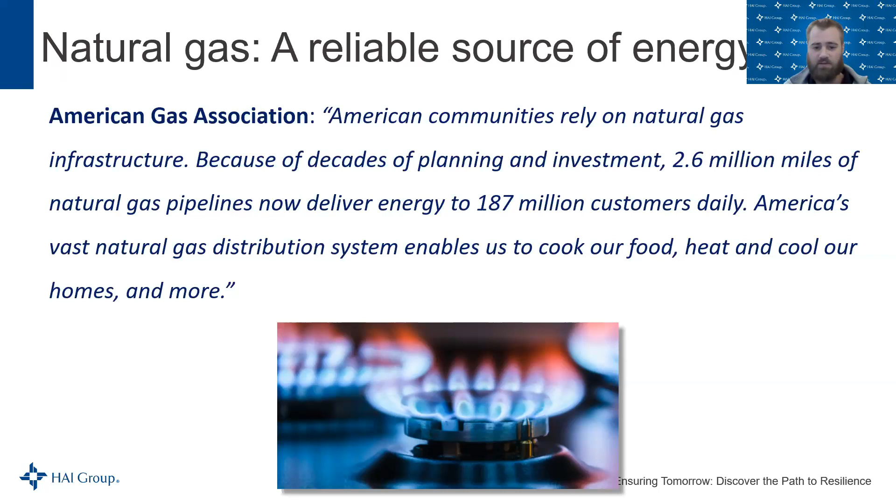For today's purposes, we're only going to be discussing natural gas. The only time that we really discuss something other than natural gas is during the properties and characteristics portion, where you'll see a video that a former coworker of mine who's since retired put together to go through the properties and characteristics and compare them to propane.

So why are we here? There are four main reasons. We're not necessarily going to go over the first one, but there was an explosion at an apartment complex in New Jersey in July 2023. That prompted the HAI group to reach out to Eversource to see if we could provide some insight on how we could avoid potential natural gas incidents. So that's really the framework or reason why we're here.

But we're also hoping to give everybody an understanding of the natural gas distribution system and how it relates to what you can do to keep your organization and the residents that live in the properties you insure safe. Hopefully we'll provide an understanding of the properties and characteristics of natural gas and how they can be dangerous in certain situations, and try to improve safety by understanding what property managers can do during an emergency and what residents can do if they're concerned about gas-related issues. For example, a gas leak, an odor of gas, or a carbon monoxide alarm going off, both inside and outside issues.

Just as a reminder before we go through it, gas is used safely on a daily basis across this country. We have 187 million customers. When it's used correctly and everything is being done to regulations, it's a very safe, reliable way to heat homes and to provide electricity throughout the country. However, we're going to discuss how it could be harmful in certain situations.

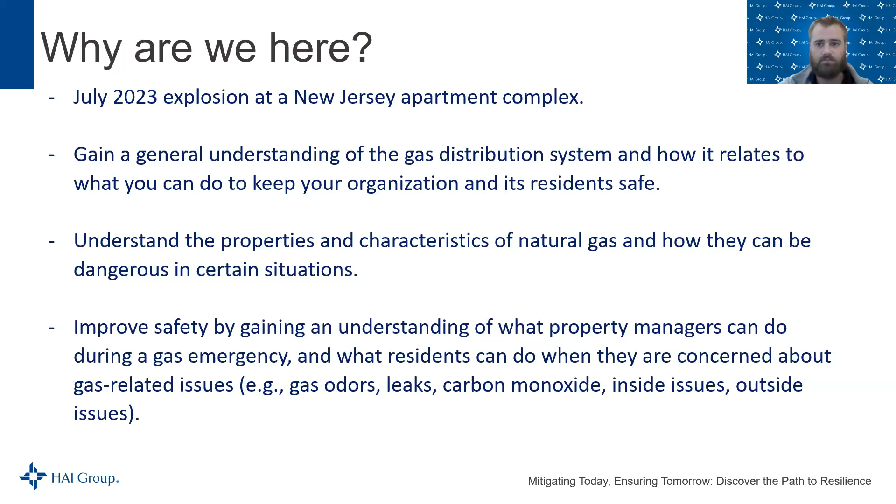Just a little precursor before we start going into this. Any decision that anyone makes with regards to natural gas should always follow their own agency policies and guidelines. No two gas emergencies are the same, and guidelines, policies and procedures exist to keep people safe. So if everyone has policies and procedures regarding responding to or dealing with anything involving natural gas, they should just be following those procedures.

All right, so before we get further in, let's have a little bit of a discussion here. I'm going to make this like a laser pointer so we can see what I'm talking about. So how does natural gas get to your community? I think everyone knows that natural gas doesn't exist everywhere naturally. It's something that has to be transported to different areas to be used.

Starting up at the top of this screen, where I'm using my mouse as a laser pointer, that's where we represent where the natural gas is in the ground. It has to be extracted from the ground and brought up into the transmission system. So producing wells exist, and those wells are used to pump gas up out of the ground and put it into the pipelines.

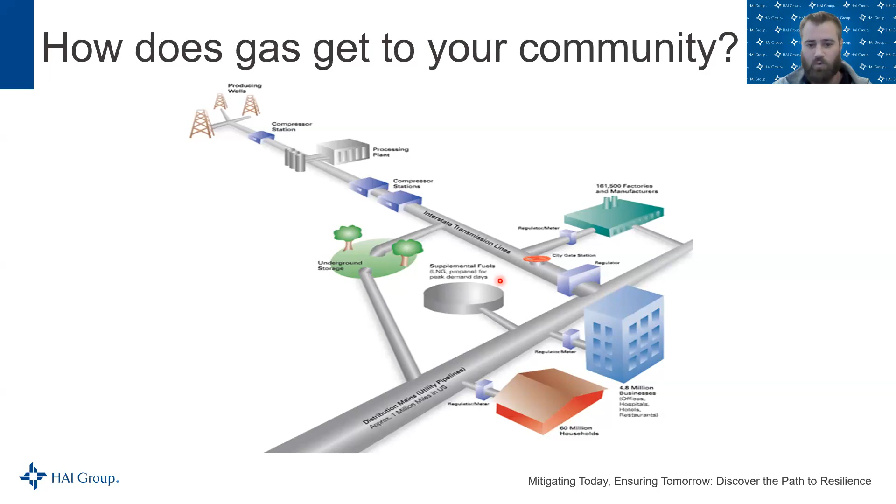This is a really high level view. No test at the end of this, but just to give an overview of how the gas transmission to distribution system works before we dive any deeper. So you as property owners or insurers are most likely going to be dealing with a local distribution company. That's what Eversource is. We're a local distribution company. We don't dig in the ground to get gas. We don't manufacture gas. We get gas from a transmission company and provide that to our customers through our distribution system. Eversource is one of many LDCs in the United States.

And why are LDCs important to all of you, right? These are the people who are going to be in your territory, who really understand how that gas distribution system works. They're the owners of it. They're the ones who are going to respond anytime you have a gas odor or any gas-related issue. It's very important that, ahead of any incident, you know who your local distribution company is and you know how to contact them. You know what their emergency number is to reach out in the event that there is something wrong or that there could potentially be something wrong.

Most LDCs, again, just speaking for what I'm familiar with in the Northeast, are going to provide training and public awareness information for their territories and for our communities, for our public safety. I know at Eversource, we provide in-station training, meaning we go to the fire stations or the police stations and give trainings to the local first responders to understand what infrastructure lives in their city and how best to respond and techniques to respond and keep themselves and the public safe.

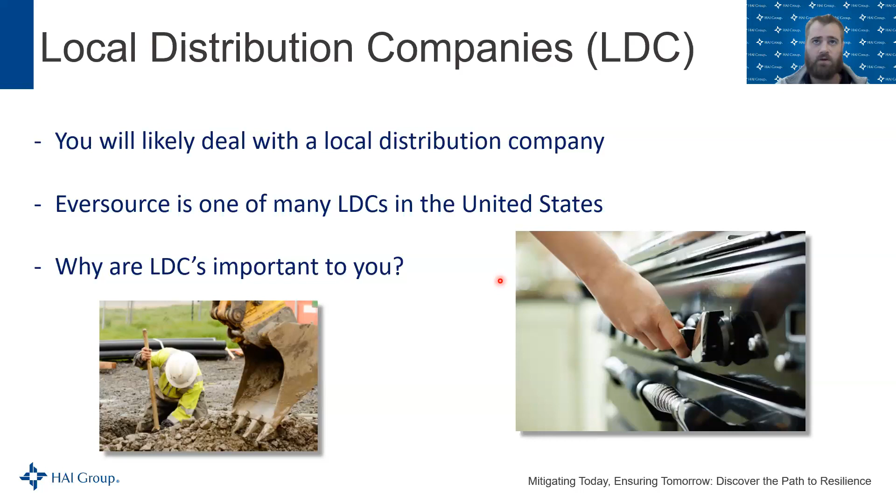I'm going to share a video next, just highlighting and showing why natural gas is something that should be taken seriously and just how quickly something can escalate. So there is some audio on here eventually.

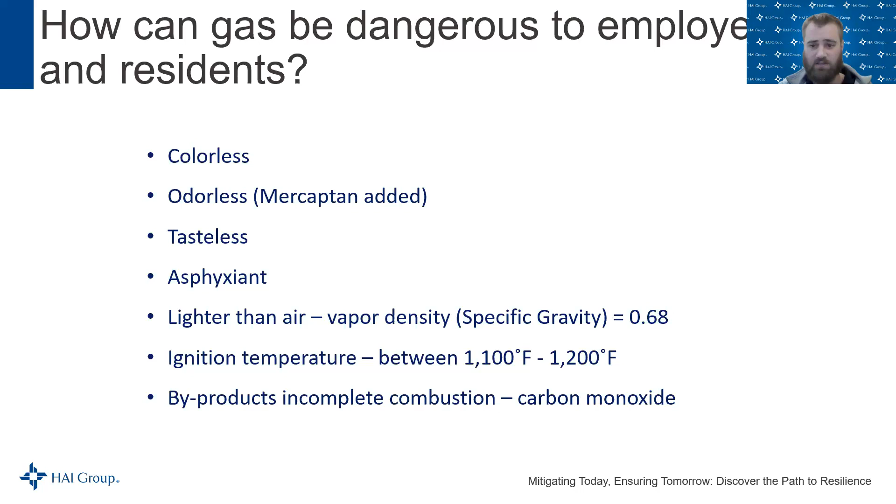Natural gas is not always flammable. It's only flammable in a very specific range. If it's below or above the explosive range, natural gas is not flammable. Natural gas has to be at a mix of between 5 and 15% gas to air to burn. If you're below 5%, it's not explosive. If you're above 15%, it's not explosive. There is a little bit of wiggle room with additives and a potential mix of propane, but pure natural gas is explosive between 5 and 15%.

That means something to someone who has a gas meter and can read what percentage of gas is in the air. But anyone who is not a first responder or a gas employee can't tell with their nose what the percentage of gas is.

So we always have to treat any odor of gas or any potential gas leak as an emergency until proven otherwise. A little bit of background: if you have less than 5% of gas in the air, fire departments will refer to that as lower explosive limit. So you could hear the fire department or the gas company refer to something as being 60% LEL, lower explosive limit. 60% doesn't mean 60% gas. It means really 3%, because we're at 60% of hitting 5%, the point where the gas would be in that explosive range.

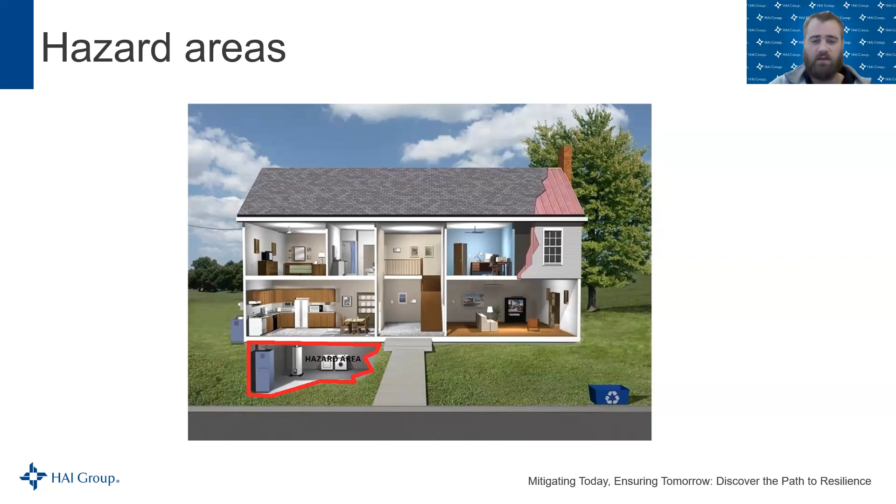So I've got to pull up another screen to demonstrate. So I mentioned that little precursor. I mentioned that we at Eversource provide in-station training, as well as anything else we can do for our public safety partners to keep them safe and aware of the risks and hazards that exist when dealing with natural gas. So I believe it was during the coronavirus, we weren't really able to get around to everyone because of the social distancing and stuff. So we produced a video.

This is a former coworker of mine, Eric Madison, going through the properties of natural gas and explosive limits, and really just summarizing everything that I just went through over the last few slides. Eric Madison was a senior specialist here at Eversource in gas emergency preparedness. Prior to joining Eversource, he was a fire chief in Western Massachusetts. So I'm just going to share that screen now and play that video.

I'm Eric Madison from Eversource Energy. I'm going to do a few short demonstrations that are really designed at illustrating the properties and characteristics of both natural gas and propane gas. These first two demonstrations illustrate the specific gravity of natural gas and propane gas. More specifically, how you can expect these gases to travel through air during an incident.

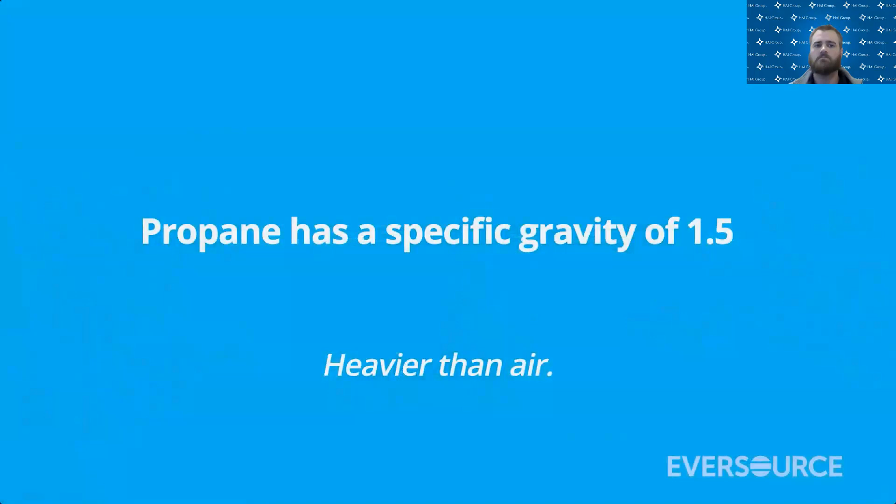Propane gas, on the other hand, is heavier than air with a specific gravity of 1.5. So propane gas will seek the lowest areas in a building. It'll seek the low areas outside, such as storm drains, manholes, or low-lying areas. So now I'm going to ignite some natural gas bubbles. When I do, I can actually feel the amount of heat coming off of that bubble. Now I'll take propane gas and I'll do the same thing.

When the propane gas burns, it's a much more intense flame that I feel, much more heat. And that's simply because propane gas burns at 2,500 BTUs per cubic foot. Natural gas burns at about 1,000 to 1,200 BTUs per cubic foot. You'll get a much hotter fire with propane gas than you do with natural gas.

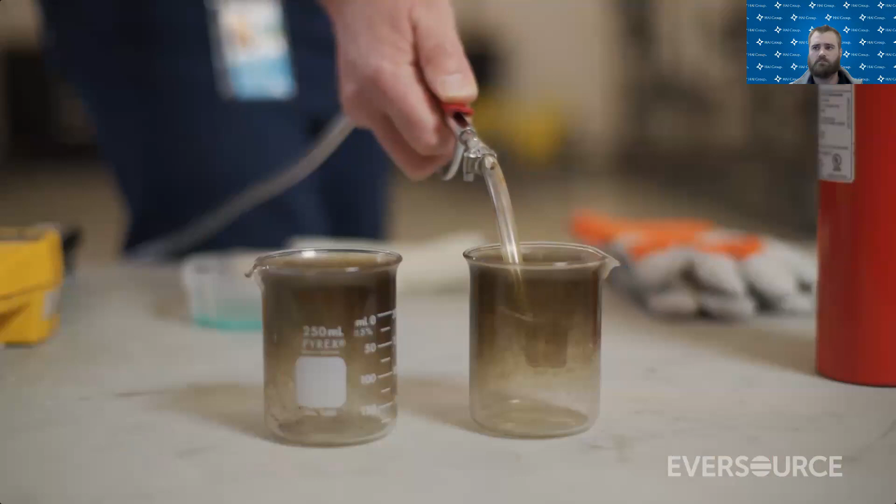To further demonstrate the specific gravity of natural gas, I'm going to put some natural gas into this beaker. Because natural gas is lighter than air, it won't stay in the beaker. And that's demonstrated when we put the flame to the beaker, there'll be nothing to burn. Propane, on the other hand, because it's heavier than air, will settle in the beaker. Just like it will settle in low-lying areas of a building, low-lying areas outdoors, manholes, sewer basins, bottom of an elevator shaft, or the basement of a building.

In fact, the propane will really stay there until we do something to get it out, to dissipate it. In other words, mix it with enough air that it's no longer dangerous. We'll demonstrate that now with the use of the torch. You notice the propane gas was still there where the natural gas had long since left the beaker.

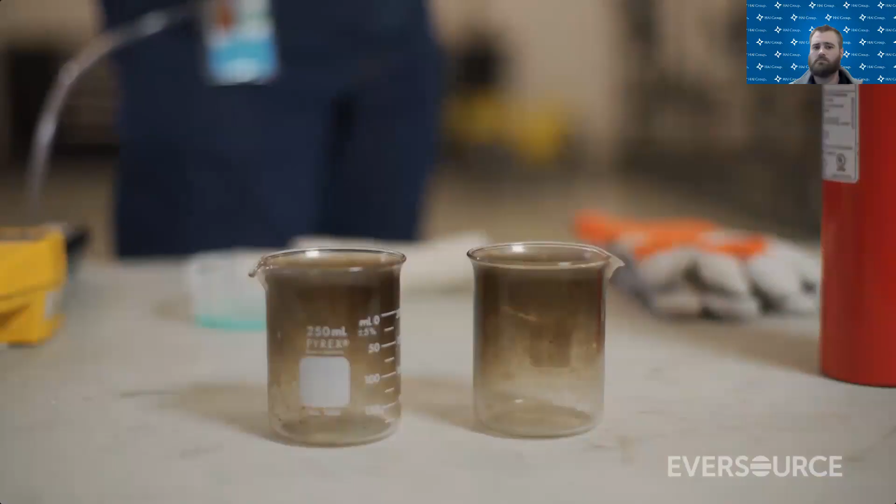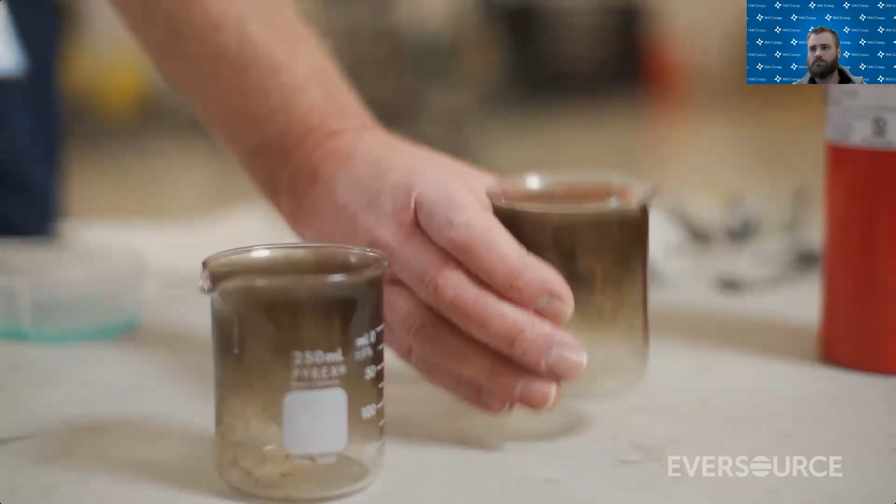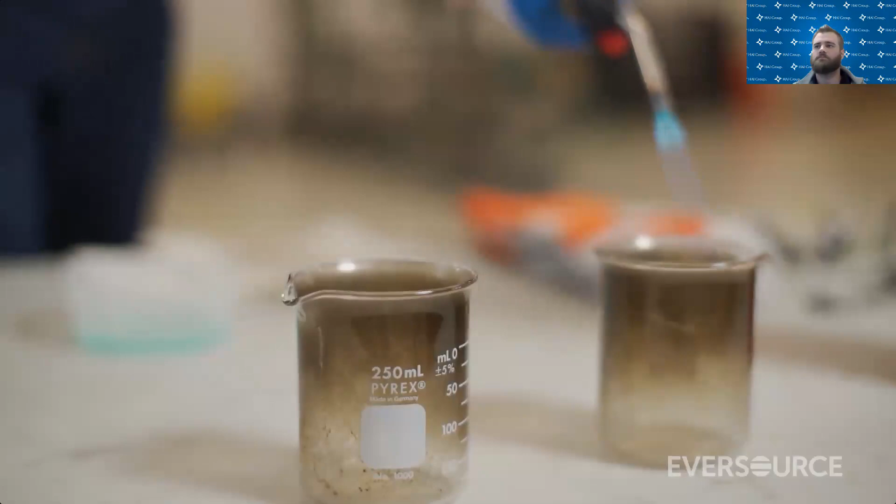In fact, propane gas, because it's heavier than air, I can fill the beaker with propane, and then I can take the beaker and just like a glass of water, I can pour the propane from one beaker to another. So now what beaker has the propane? Let's first try the one I first put the propane in. Nothing's there. If we move the flame over to the other beaker, you'll notice the propane's there and burns.

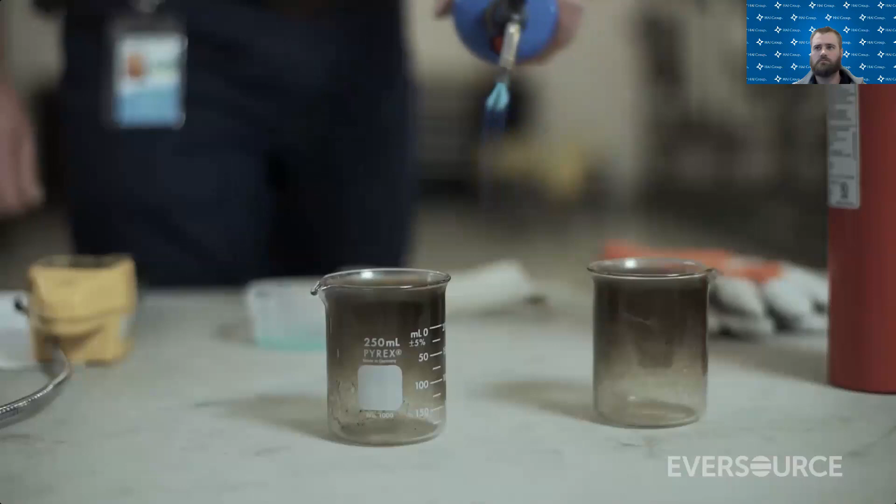Understanding the weight of these two gases as compared to air will help you develop a successful and safe scene strategy.

To demonstrate the explosive range of natural gas, I'm going to start by putting a little bit of gas into my explosion chamber. I'll try to ignite the gas and you'll see we're getting a spark but no ignition. That's because the amount of gas in the explosion chamber is below the flammable range. It's below the LEL but not within the explosive range. Conversely, if I add a little bit more gas and try to ignite it, we get an ignition.

The final illustration for the explosion range, I'm going to fill my explosion chamber with even more gas yet. I'm going to attempt to light the top. You'll notice we get a spark but no ignition. That's because it's outside of the flammable range. There's too much gas at the upper end. However, at the lower end, or what could be the lower floors of a building, we get an ignition. This demonstrates how you can have two different atmospheres contained within the same building. One above the explosive range or one in the explosive range or even below the explosive range.

As you can see from these demonstrations, gas must be at the right mixture to burn or to explode. We've also demonstrated that when you consider the specific gravity, you can have different mixtures all within the same building. Explosive mixtures in one area of the building, while in the other area of the building, it's undetectable. Understanding these differences is important to first responders when they're investigating natural gas or propane gas odors.

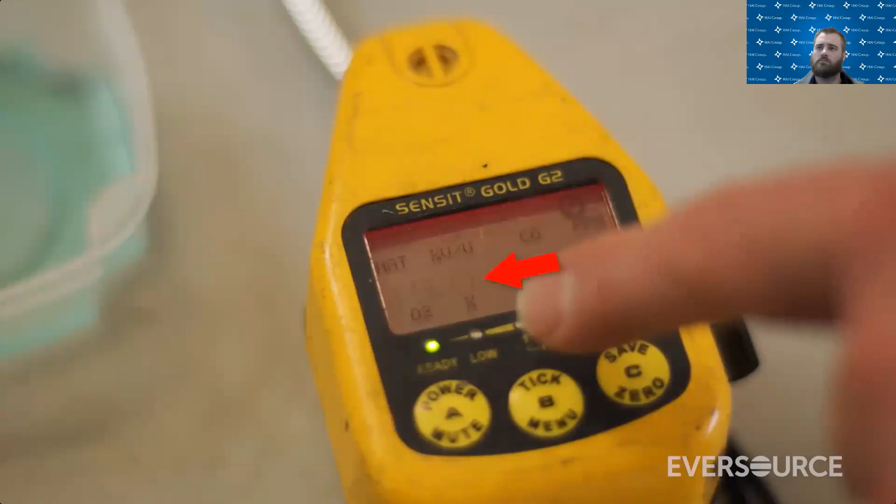Let me demonstrate. I'm simply going to fill the chamber with some natural gas. And we can tell by watching the combustible gas indicator that the oxygen levels are quickly falling. Under OSHA regulations, anything at or below a 19.5% oxygen level is considered oxygen deficient and at risk to the person in that atmosphere. You can see that we're in an explosive atmosphere and far below the 19.5% oxygen level. Remember, this ability of natural gas to create an oxygen-deficient atmosphere, as well as a flammable or explosive atmosphere, is one more reason firefighters need to use all the available personal protective equipment, including their self-contained breathing apparatus.

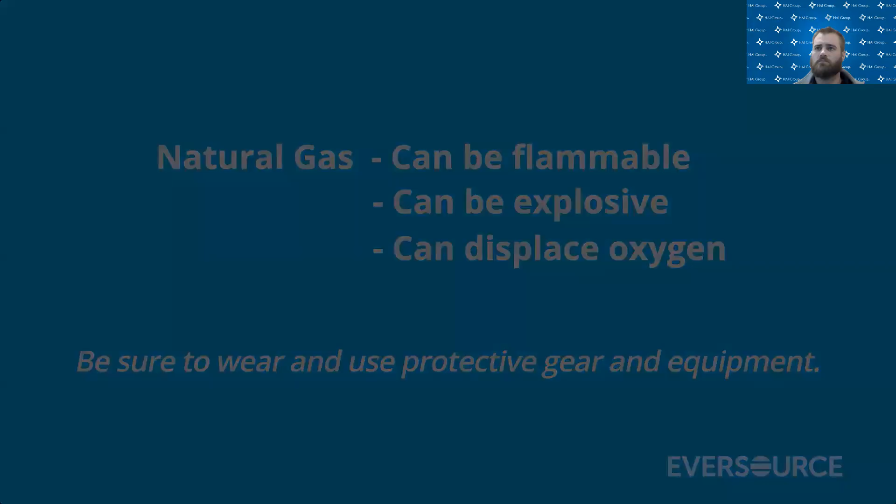Natural gas burns most efficiently at 10%. When we burn natural gas somewhat above 10% or outside of that efficient range, we get a lot of byproducts of combustion. One byproduct most dangerous to us is carbon monoxide. Today's heating equipment requires a lot of fresh air to support combustion, and it draws that fresh air from outdoors. No longer do we rely on the fresh air in a basement or in a boiler room to supply that combustion.

If that fresh air intake becomes partially occluded, like with snow buildup or vines or a bees' nest or something along that line, it restricts the amount of oxygen and we end up burning the gas rich. That's where we can build high levels of dangerous carbon monoxide. Let me illustrate. So I'm filling my chamber with a high amount of gas so that when I burn it, it's going to be burning somewhat above 10%.

We'll notice on the combustible gas indicator that I'm getting very high readings of carbon monoxide. In fact, it's reading 2,000 parts per million of carbon monoxide. This combustible gas indicator only reads up to 2,000. So we have somewhere above 2,000 parts per million of carbon monoxide within this chamber.

As we all know, carbon monoxide has no odor. However, frequently, firefighters will be called to investigate the odor of something burning. And while investigating, they find high levels of carbon monoxide. This is because another byproduct of incomplete combustion is aldehydes. And aldehydes generate a strong combustion odor. If you smell aldehydes, you likely have a carbon monoxide issue too.

Some fire departments employ a tactic when they respond to gas calls where they shut off the gas and start venting the building before they know what the level of gas in the building is. This can oftentimes lead to a much more dangerous situation. For example, if a building is above the explosive range, although not a good situation, it's a much more stable environment than a building in the explosive range.

By shutting off the gas and venting the building, you could be effectively bringing the gas level in the building back through the explosive range. If you have not secured the ignition sources or completed your evacuation procedures, you're moving into a very dangerous situation. I'm going to fill my building up above the explosive range. Then I'll shut off the gas and we'll start venting the building, all the while we have ignition sources still going.

You'll notice when we try to ignite it, we get a sparking, no ignition. That's because we're above the explosive range. So now I'll demonstrate venting the building. Again, after each ventilation, we'll try to ignite the gas. At some point here, we're going to enter back into the explosive range, just as you would by shutting off the gas and venting a building.

If a building is above the explosive range, although not good, it's actually safer than a building in the explosive range. By shutting off the gas and venting, the gas in the building will pass through the explosive range as it ventilates. This can create a dangerous situation if ignition sources have not been secured and the evacuations are not complete. It is important to evaluate the scene before you employ tactics. This way, the strategy you develop will be the safest one possible.

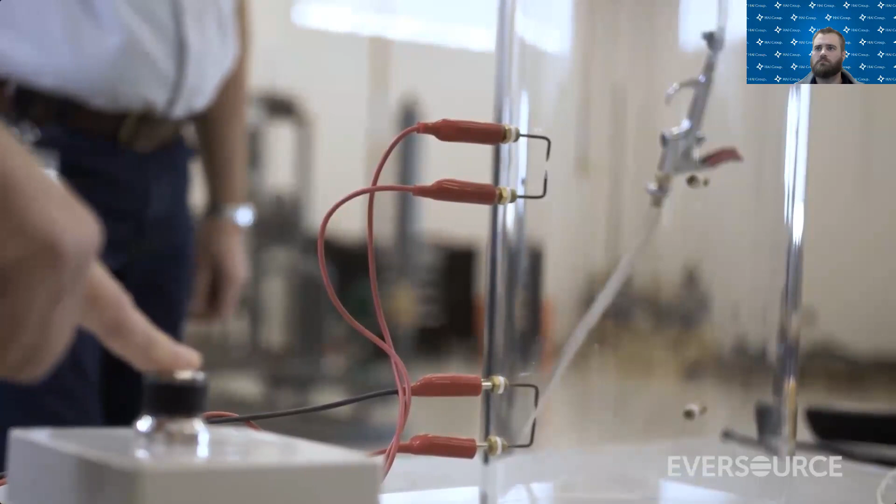This next demonstration will illustrate the flame propagation of natural gas. Natural gas burns fastest in an upward direction, next fastest side to side, but slowest in a downward direction. This is why a gas explosion with a low point ignition will cause greater damage than an explosion with a high point ignition. The first ignition is going to be igniting at the top and burning in a downward direction. You notice we could almost count one thousand, two thousand as we watch the flame move down the chamber.

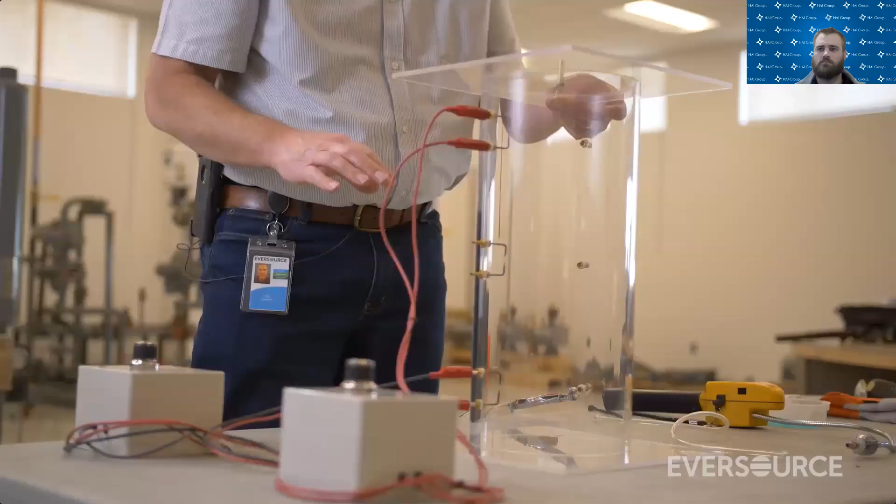The next demonstration will ignite it from the bottom, given the same amount of gas. Watch how much faster the flame moves from the bottom upward than the flame did moving downward. Also, watch the lid. We'll get more movement out of the lid because we create more pressure, burning the fuel faster. The last one I'm going to do is we'll ignite it from the middle. This way you can watch the flame move upward and downward at the same time. Now it's a small chamber, it happens quickly, but you can see it.

The purpose of these demonstrations was to help you gain a better understanding of the properties and characteristics of natural gas. I hope these illustrations will assist you in operating more effectively and safer at emergency scenes.

All right, so that was just a review of the different properties and characteristics of natural gas. And so, like I said, we've gone through the distribution system and how gas is distributed. And we've gone through the properties and the characteristics of natural gas. And so we've identified that when natural gas is leaking or someone smells natural gas, there is a potential emergency that needs to be investigated and treated as an emergency.

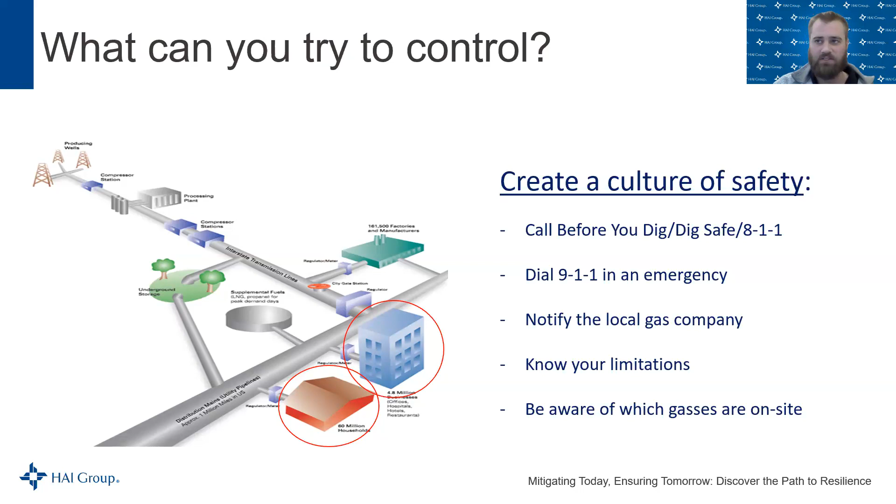Notify your local gas company, know what your limitations are, and just be aware of what gases you have on site. So, as I said, call 811, right? Call DigSafe, call before you dig. It's really anytime you're digging, anytime that you're doing anything on your properties involving really changing the soil at all, changing anything in the ground, you should be calling DigSafe. It's a requirement. It's a law that DigSafe has to be called.

I got something in chat. I'm sorry.

But at least it is going to be really in everybody's best interest to call DigSafe to make sure they know what's underground before digging in. Again, I say it's a law. I don't know the requirements in all of the territories across the country, but for example, in Massachusetts, violation of the DigSafe regulations, according to the DigSafe website, if there's an issue caused to natural gas distribution or a hit on natural gas distribution, could result in a potential civil penalty up to $200,000 for the infraction. So it's something that's taken very seriously, and it's a service for everyone to use before digging, right?

And so according to PHMSA, the Pipeline and Hazardous Materials Safety Administration, research has revealed that if someone calls 811 before they dig, there's a 99% chance that they avoid any incident, injury, harm to the environment, or potential death. And again, this is for anything. You should be calling DigSafe.

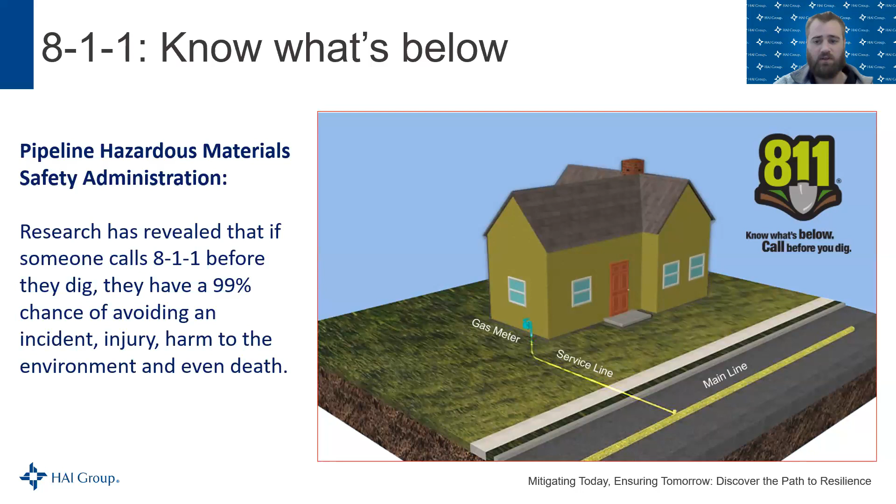So different states have different requirements. We actually have three operating companies, but in the two states that we operate in, it varies from 48 hours to 72 hours ahead of any planned work that they have to call. But just make sure that you're calling DigSafe before any digging. Tell the people who you are communicating with, who you're insuring, your property managers: if they're going to be having any work done on site, make sure that DigSafe was called, and make sure that ample time is given to ensure that services are marked out prior to any work being done.

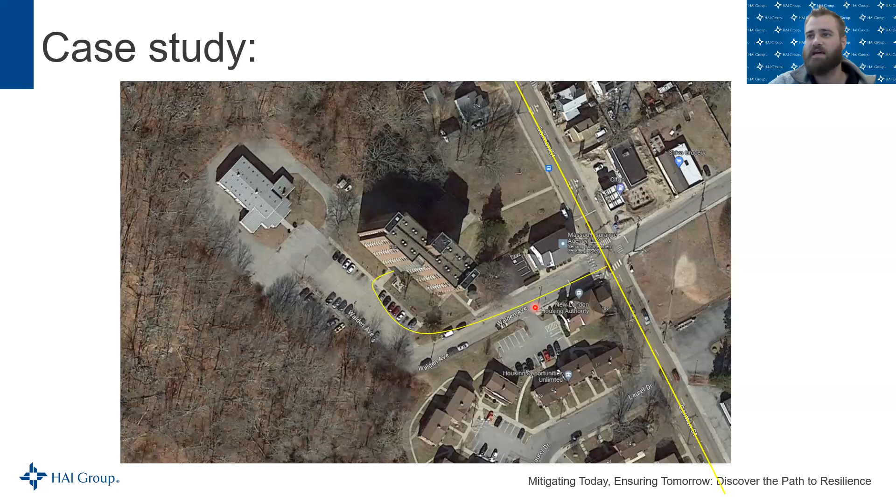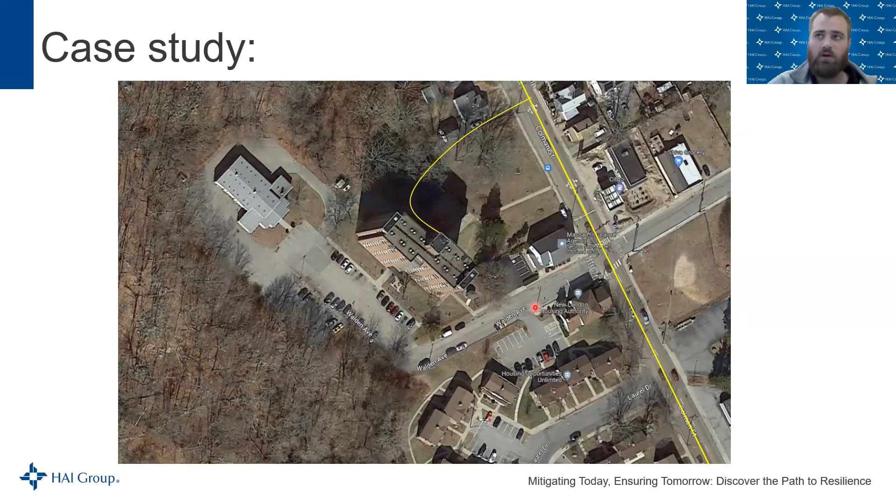You don't know. No one knows unless they call DigSafe, right? There's a possibility it could have gone down Walden Ave and come in through that parking lot, or does it go up through this person's backyard? Without calling DigSafe, it's just assumptions. The property owner or the property manager doesn't necessarily know 100% where it goes. So in this case, DigSafe was called out, shows where the gas line is, and we can see here that the gas line actually goes through the long way.

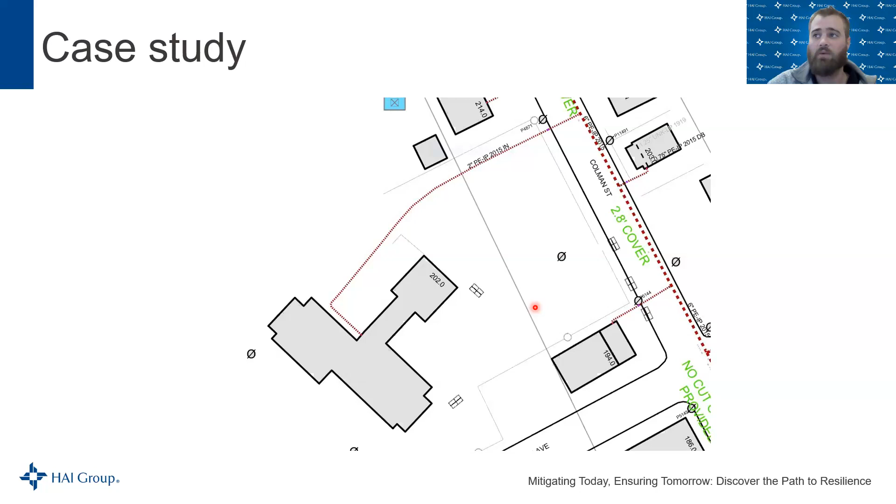It doesn't come off of the street like you would expect, and that really just highlights the fact that distribution mains and service laterals can really be anywhere, right? They can be in streets, they can be in parking lots, driveways, grassy areas, right-of-ways.

They can be anywhere. I mentioned that we've been using natural gas or manufactured gas in the United States since the 1800s. City layouts have changed in the last 150 years. So where a street used to exist and the gas main was put in, that street might have completely changed, and the gas main is now going down an area that you wouldn't necessarily expect, or services are going around areas that you wouldn't necessarily expect.

So it just highlights the importance of calling DigSafe, calling the call before you dig number, calling 811 prior to any excavation that you have. Pipelines also are all kinds of different materials, all types of different sizes, so they can really be anything. You could run into cast iron, coated steel, unprotected steel, plastic. There's all types of different.

So even if you're digging, not calling DigSafe, you don't necessarily know what's underground. You don't know what you're running into. There's no reason to be digging ever without calling DigSafe or call before you dig or 811. Again, whatever the entity is that manages that in your territory, in your state.

Even if just hand digging, a lot of gas service lines coming off of the main running from the street to a house are going to be plastic. And a lot of those, you'll find 1/2-inch plastic pipes. Just someone digging with a shovel could go right through that. There's no reason to be digging without calling DigSafe, right?

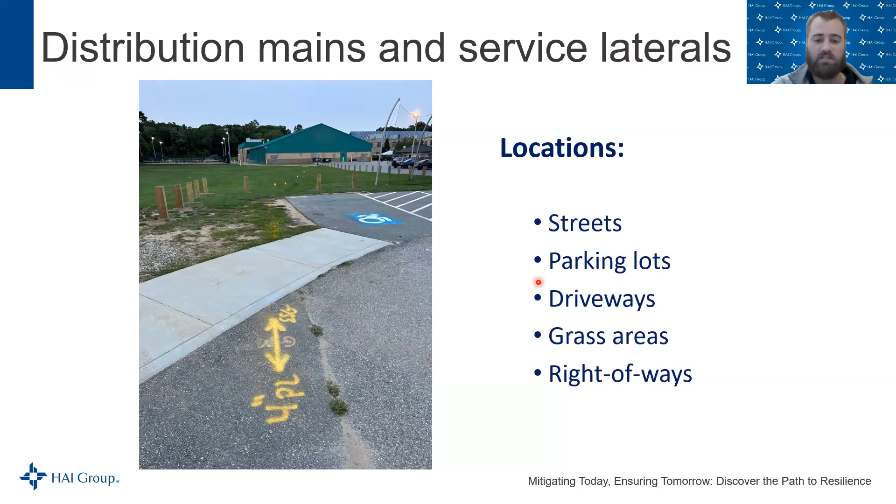And then even with regulations and even with standard system designs, there's always going to be variances to distribution systems. Out of 1,000 services, one of them is going to be different. There's going to be some situation that led the construction crew to put it in a different way. That's why proper record keeping and calling DigSafe so that you can access those proper records is going to be vital anytime that work is going to be conducted on properties.

So in addition to calling DigSafe ahead of an incident, anytime that we recognize that there's an odor of natural gas or a potential gas leak, it's important that you call 911. The fire department is going to respond much sooner than a gas company is going to. Even though we're going to meet our standards and our regulations, and we're going to be there as soon as we possibly can when called, the fire departments have much faster response times.

So really just highlighting, just call 911. If you smell gas, or if your resident reports smelling gas, call 911, get the fire department out there, and try not to use any ignition sources. I was the director of one of the largest 911 centers in New England. And if you think you might have to call 911, just call, right? If there's a doubt, if there's a question that maybe we should call 911, just call 911.

Let the fire department be the ones to determine that there was no emergency. Don't put that call on yourselves. Follow your procedures, and hopefully your procedures are, at the recognition of a potential gas emergency, call 911. Call the local distribution company. Make sure that phone number for your local distribution company is available for your employees and for your residents, because the sooner you call, the better, right? We'll be able to provide information as soon as possible. We'll be able to respond as quickly as we possibly can, but we need to get a call to respond.

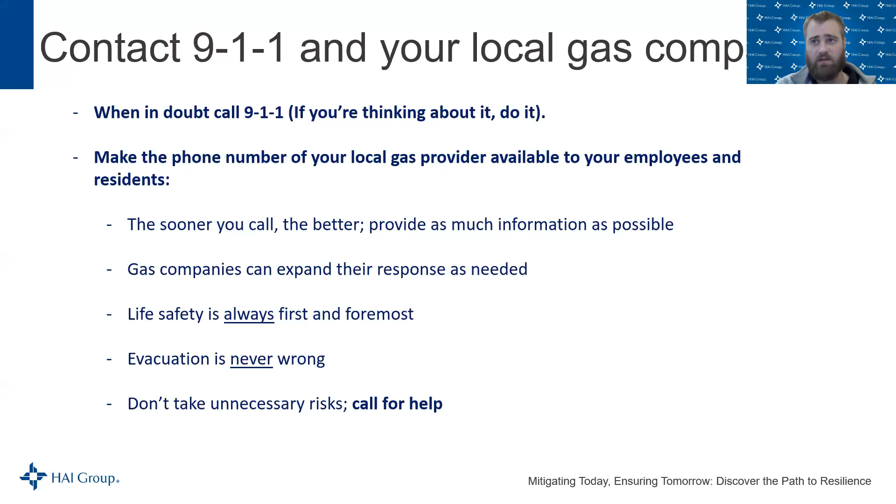Evacuation, keep in mind, evacuation of a building or evacuation from an area is never going to be the wrong decision to make. If you think that it's an unsafe area, make that evacuation. And don't take any unnecessary risks, right? Recognize that you're not going to be the subject matter experts for natural gas situations. Call the fire department, call the gas company, reach out to those support mechanisms that are in existence.

If you decide to request an evacuation or to do an evacuation on the building, just make some considerations there and remember about avoiding ignition sources. So don't use electronic ignition devices, don't use PA systems, don't use megaphones, don't ring doorbells, don't use fire alarm systems. And from that question earlier, again, the DOT guidebook for hazardous materials recommends being at least 330 feet away from the area once they're evacuated.

So Eversource or whoever your local distribution company is gets called to the scene. There's a potential inside leak. So the gas company is going to show up. We're going to call the gas company. We're going to make sure that we're on the way. We're going to, if necessary, evacuate those occupants. We're going to use caution not to use any ignition sources. And potentially the gas company is going to request the electric utility to turn power off for that area or that specific service if gas is found in the building and is over that explosive limit, to, again, just eliminate ignition sources.

With this, just keep in mind, right? Just remember, knowing what your limitations are. So, find out what the property managers of the buildings that you insure are currently doing when they have an odor of natural gas. Do they know? When they get called for an odor of natural gas, are your property managers following through on everything that is being reported, right?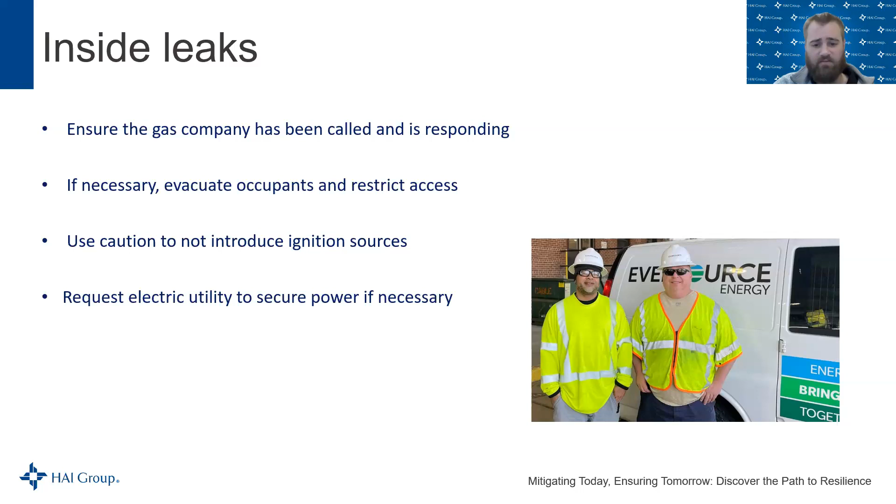Just a note that I have in the back of my head here is not everyone necessarily knows exactly what natural gas smells like. So it could just be they're reporting a weird odor, right? They're reporting, hey, I smell a dead animal, right? The property managers and whoever is responding, or the fire department, should be considering that odor of potentially a dead animal: could that actually be natural gas? Could that be something that we need to investigate for an inside leak? All right, so just different things that have been reported to us as a company. Everyone should be considering those.

And then for exterior leaks, right, natural gas in an outside underground pipe is usually going to try to rise, right? There are different humidity issues and temperatures that may make it a little bit variable, but generally natural gas wants to go up into the atmosphere because it is lighter than air. So as natural gas is going up, there could be a potentially hazardous concentration above where that gas leak is. There also could potentially be a hazardous or explosive concentration below where that gas leak is, below the level of the ground there, because the gas is coming from under the ground up. So we need to treat that area around there as potentially hazardous. Stay away from that area. Let the fire department, let the gas company respond and check that area.

So gas underground is also going to migrate just like water is going to migrate, not just up, it's going to go left and right. So natural gas really could follow water lines, could follow sewer lines, could follow communication lines, could follow anything underground, just following that path of least resistance.

So it's possible that the building itself that we're responding to might not even have gas, right? But the gas could be migrating in through a sewer line or through any crack in the foundation even. Gas can migrate and go from the point of the leak through the path of least resistance.

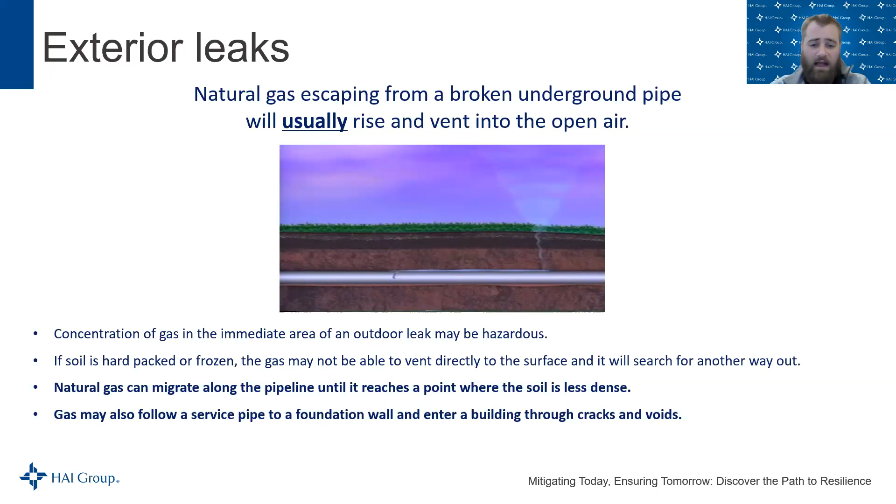And I'm realizing that I read through all this without going through these bullet points. So again, the concentration of gas in the immediate area of an outdoor leak may be hazardous. If the soil is packed hard or frozen, the gas might not be able to vent directly to the surface and will search for another way out. Natural gas can migrate along pipelines until it reaches a point where the soil is less dense and then could come out. And gas may follow a service pipe into a foundation wall and enter the building through a crack and void. So just all considerations to make.

And so what's going to happen when we get there, right? So we get a call, we smell gas, or there was a hit line. So what are you going to expect from a gas company when they respond? Really, you should expect a thorough investigation. You should expect us to go through the area, to check inside of any buildings where we would anticipate gas to build up. We're going to make a determination on if natural gas is involved.

So we'll get called. I don't know the percentage of calls, but we will get called for odors of natural gas that will end up being a propane leak from someone's tank or from a grill, and we can identify that that's not natural gas, it's propane, and support the first responders through whatever they need there. We will ensure that all of the systems are safe, that appliances are working. We will ensure communication with occupants and the responsible party, determining if anything we find necessitates a follow-up.

We're going to repair any of our own equipment if necessary. If we find appliances that are not working correctly, if we find a boiler that is not burning at the correct percentage, we're going to do this thing called red tagging it, which basically means we're going to lock it out and tell that property owner or homeowner that they need to have a plumber or someone licensed come out to repair that appliance to get it back into working condition and be safe, right?

We'll see that on carbon monoxide calls where an appliance is not working correctly and needs to be put out of service so that carbon monoxide is not continuously pumped into the house, right? And then once everything is repaired and we've put everything back into working order, we're going to relight all the appliances. We're going to get that meter back working.

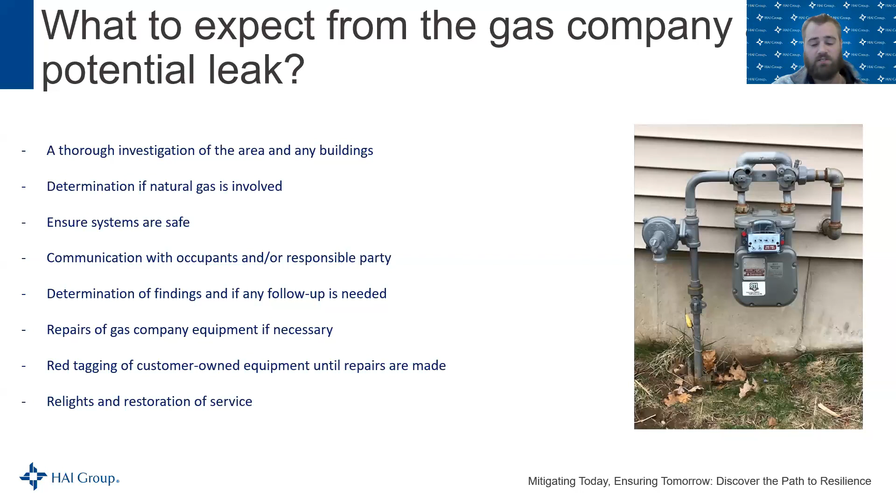And really that's what you should expect from us, and you should expect from any LDC, or any local distribution company, that you call to the scene to support you. Do everything that they can and everything that we can to give you the tools and all the information and make sure that we leave that situation safe. Make sure the situation is resolved and we leave it in your hands with a safe environment.